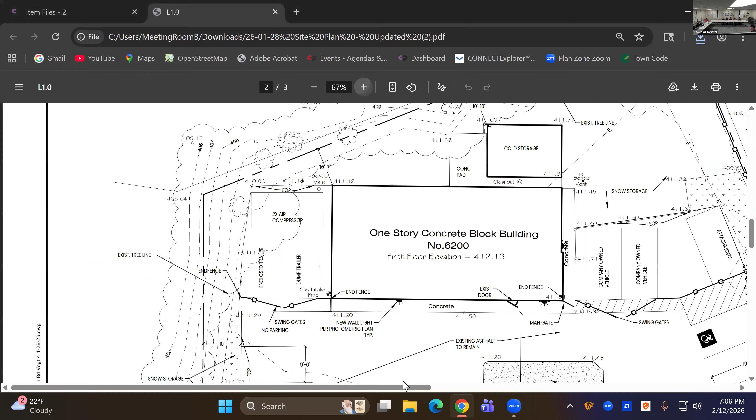I forget the gentleman's name, Jeff something, from FD. He looked that over and the plans we selected work for their requirements. We changed up the shape of the bed for vehicle movement, added some details as far as where parking lot edges are identified, and added the lighting plan.

Included a detail for the sign, which is going to fit the existing sign on the building, less than 20% of the front facade square footage. I think that is pretty much all the changes.

Had a sewer and septic company come and confirm the septic is working, with the understanding that the county will not approve septic repairs or replacement. If that system fails, we will have to hook up to municipal sewer.

Yeah, okay, we've worked through this one a couple of times. Any further questions? Okay.

I will put forth a motion to approve the site plan dated 12/16/2025 and last updated 1/28/2026 with the following findings and conditions. This applicant has worked with the board to present a project which fits with the neighborhood and area and within the design guidelines, notwithstanding the many site constraints.

This board has reviewed the Onondaga County Planning Board referral of 1/7/2026, which made the following modifications, accepted as conditions of this approval by this board: work within the state right of way will require a highway work permit. Private use, including storage of or installation of hardscape materials or structures within the state right of way, must be coordinated with New York State DOT.

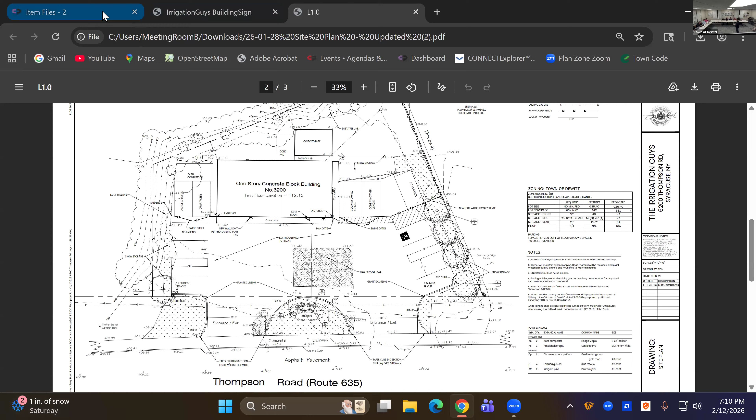Welcome, hello everyone. I'm Tony with Victory Sign. I'm representing Saab Technologies. They're in the Colomer Business Park area.

I believe we have a ZBA application in now. Correct, and I guess this is just a recommendation. So what they're trying to do is they want to put an illuminated channel letter sign on the front of the building. It's a front lit illuminated sign.

The sign size and style complies with code, but the difficulty is the code says a sign must face the main road. Well, in that plaza there is a road in front of their building, but it's not a named road, so their sign would have to go on the side of the building. The problem is the side of the building doesn't have a public entrance, and it is a fenced-in area.

Their entrance does face Colomer Road and their parking lot. So if you come down Aspen Park and pull in, you're going to be parking in this parking lot, and that's going to be the main entrance for the building. It does face the road, so it makes complete sense to have the sign there and not on the side of the building where there is no entrance whatsoever. So that's what we're asking for: permission to put the sign on the front of the building.

Northwestern does have a sign right here on the front of the building, and there's a couple other buildings in the plaza, or complex, kind of the same way. So it does make sense to put it where it is. And the sign that we're proposing does comply with square footage, styles, everything else.

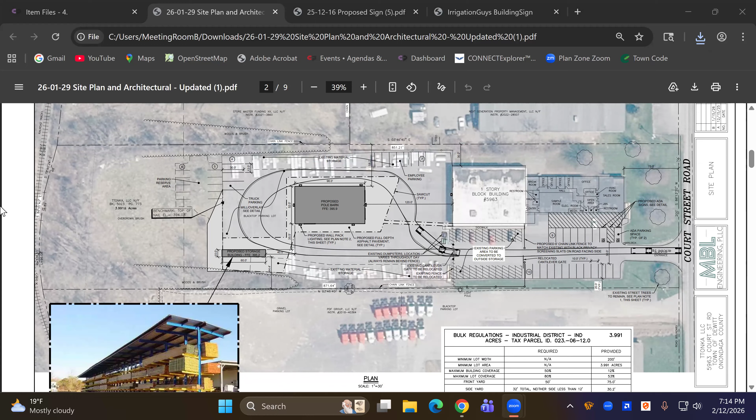So yeah, from the last meeting we talked a little bit about parking. First on the parking side, you can see we have put together a plan from the original building drawing that shows the front layout of the warehouse and the office space. Then just below what you're on right now, you can see the bulk table that shows now we've broken out the office space versus the warehouse.

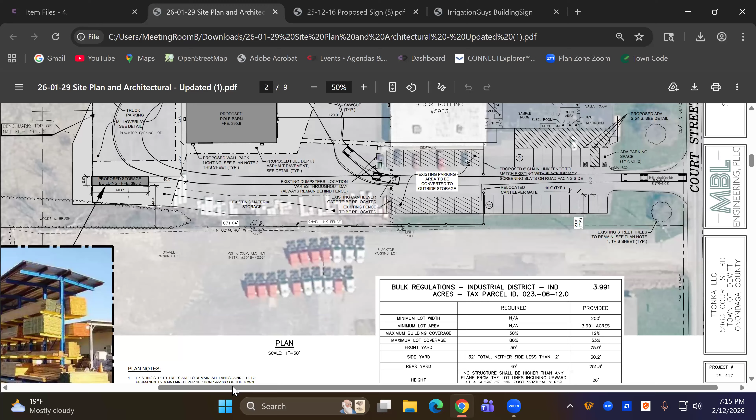But we did show the future allowed parking in the back left corner, which is underneath, I believe, that 25% number, to show the additional 11 spaces that would be shown that they fit on the site, but we don't need them. And I think we all agreed last time we don't need them, but as long as we show that area. So on the back, yeah, scroll up a little bit, right there where we say the parking reserve area with the 11 spots, which worked out well. Plenty of room there, obviously, so that was good there.

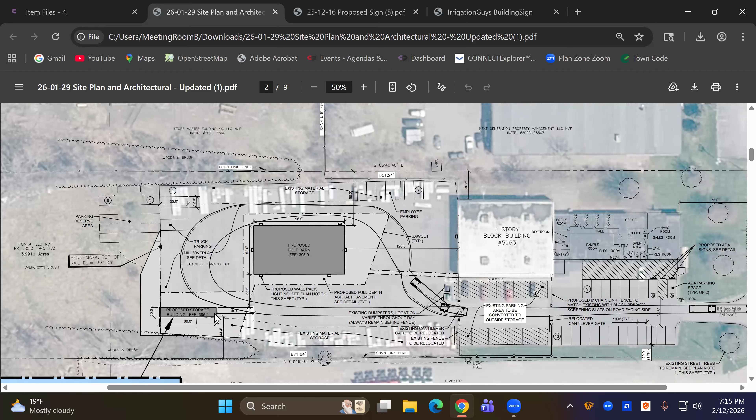Then another comment that we did was we wanted to add the fire truck or the tractor trailer turning on this plan, which you have, and also the storage building, the 10 by 60 storage building for the rack storage. That photo of that on the bottom left-hand corner was just incorporated into the plan as well.

I think based on the last meeting, that's really the major changes that occurred - was showing the office layout and all the interiors of that with the parking requirements, and then showing all that and the truck turning movements.

So one other comment that we wanted to talk about was obviously where we have the existing dumpsters - you can even see them in this aerial today - and the discussion of either creating an enclosure for them or screening them. So what we did right now is we were adding the existing parking that we're converting to more outdoor storage, right where they're at right now. We're moving that fence line that used to exist on the back side of the warehouse, and we're just pushing that out to the front because that parking just doesn't get used at all. So that gives them the space that they lost a little bit out back with the truck movements in the building.

We're able to use them in that space. What we proposed is that chain link fence that would be put on the front of that warehouse would be a screen chain link fence.

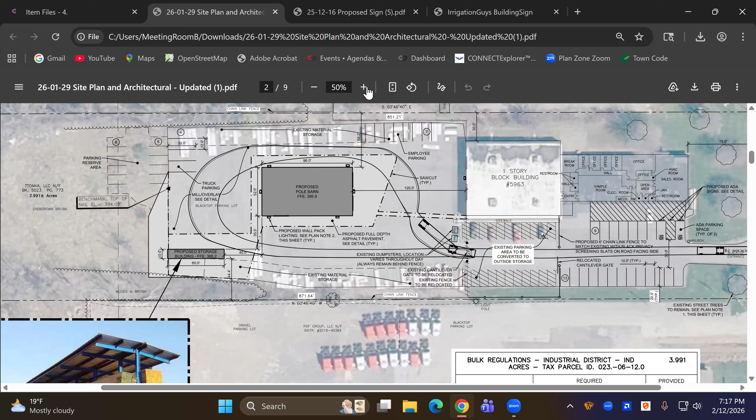But I think more important, those dumpsters are behind it today, and they will continue to be behind it. The nature of their business, the dumpsters actually get moved continuously throughout the day. They move them to whatever project they're working on. If they're packing up or taking material to unpack, shingles or whatever it may be, they actually grab those dumpsters and move them to those locations. But at the end, they kind of get put where you see them now.

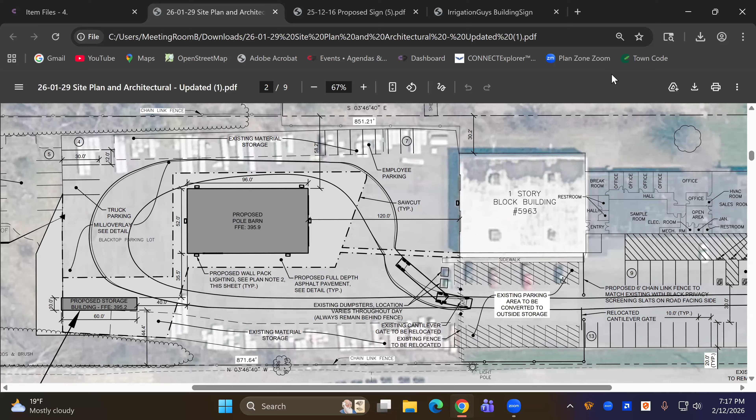So one comment when we were creating a complete dumpster enclosure, we wanted to talk about section 192-93 of your supplemental code, and how we look at this. Dumpsters must be completely screened from view from any abutting residence, residential district, public street, or walkway, and the screening must be at least as tall as the dumpster. It applies to all dumpsters, including those used for collection or storage of recyclable materials, whether public or private. So that section is where we feel like we really fall into being a dumpster and not a refuse collection area, because these dumpsters are very moved around.

We are screening them more than they are today, even though they're back behind the fence today. The fence isn't screened, but with what we're proposing, moving that fence out, the dumpsters are now further away from that fence line. There'll be a lot of shingle storage and stuff in front of the dumpsters now, where we're showing that future storage. So all that again is taking away from seeing those dumpsters as well.

But I think the most important thing is the screening that we have on that new fence along the road. Can you talk a little bit about what that screening is? We were just going to use our 6-foot chain link fence with black vinyl slatted screening inside the fence. So it's just your typical slat screening in the fence.

So that's generally not something that this board favors. Those vinyl slats blow away, they disappear, they crack and fall apart, and you get missing chunks here and there. Is there another option for screening?

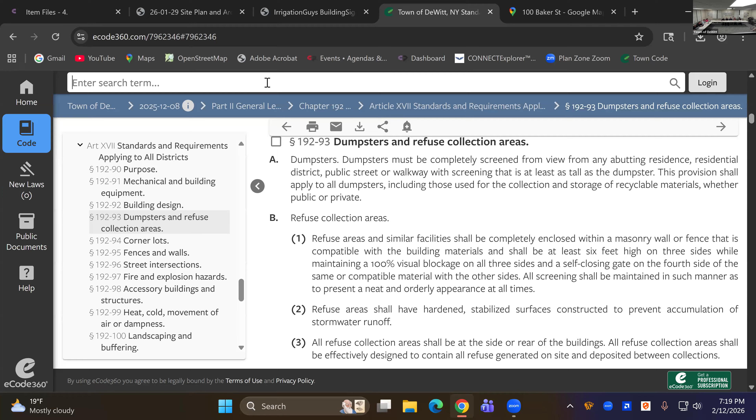Okay. I asked that because my main intent of asking is our dumpsters could be put behind the building all the time. And I believe the owner's on — I can't see who's on Zoom right now. Yeah, I'm here, Mike. I'm sorry.

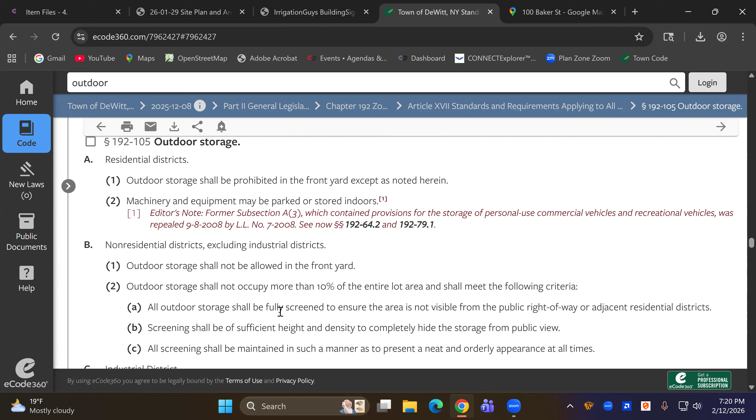Yep, one thought process we came up with is to continue doing what we're doing with the chain link fence, which will help screen the storage area, but also move the dumpsters to behind the building. Furthermore, we talked with the owners and they move them so much that they're okay moving them inside when they close at night and putting them inside, so they wouldn't even be outside at all after hours. So that's something that we would propose as well, so maybe that would take care of your dumpster concern.

Yeah, I mean, I think certainly having them behind the building is much better at a minimum. If you can get them in the building, that's great, but our concern is just that those would be screened by the building so that they're not actively visible from the street.

Yeah, absolutely. We could tuck them in behind the northeast portion of the existing warehouse, where it says one-story block building, in the upper left-hand corner of the screen. There's enough room to place them right there, and they would be completely out of sight. The nice thing about having them there is they're also kind of out of your truck turning area, so you're not that close to them.

I would say that's a reasonable solution, at least from my perspective. That works — I agree. So then the other item is just the screening.

And did we not look at some of the other fences around that area? Was that this one, or was that this one? They are chain link, but none of them had slats.

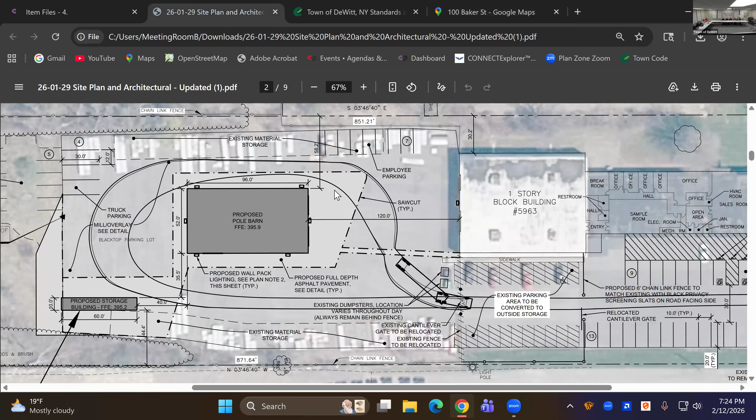Okay. Any other kind of questions? I mean, I think those were the big issues that we had on that one.

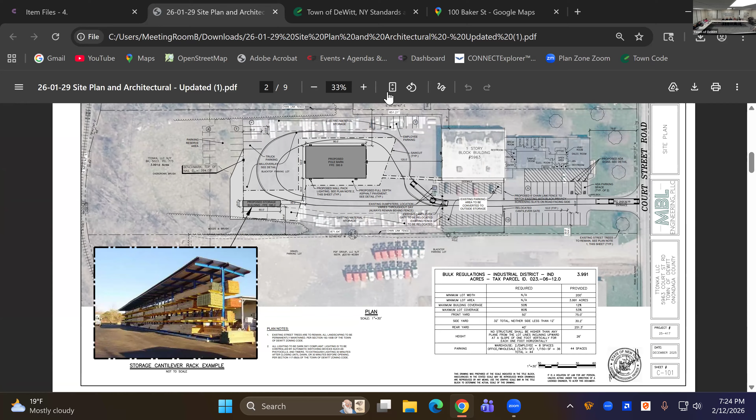So for subsequent drawing packages, show the dumpsters relocated where we were talking about, and remove any indication of vinyl slats in the fence.

Is this something that can be a condition upon approval, or is that something that we need to get updated with your drawings now before any approval can occur? Yeah, we'd like updated drawings, please.

Yeah, make those updates, get them in. If you get them to us quickly, we can see how many projects we have on the next agenda, but we'll just see what we can get those to you, probably tomorrow, get those couple notes changed, and then if we can get that on the agenda in 2 weeks, that would be fantastic to get your final approval next week. I'm not sure what everything that came in today yet, but we can try.

Okay, yeah, we can do that. And I think, Joe, that is reasonable if we can get in the next 2 weeks with just these minor changes. Oh yeah, that's reasonable, yes.

Well, recognize that our next meeting is in 2 weeks, so you can't turn it in the day before and expect to be on that agenda. If you want a hope of being on the next agenda, because these are minor modifications to this set, give us enough time to review them. I would have them in as soon as you possibly can.

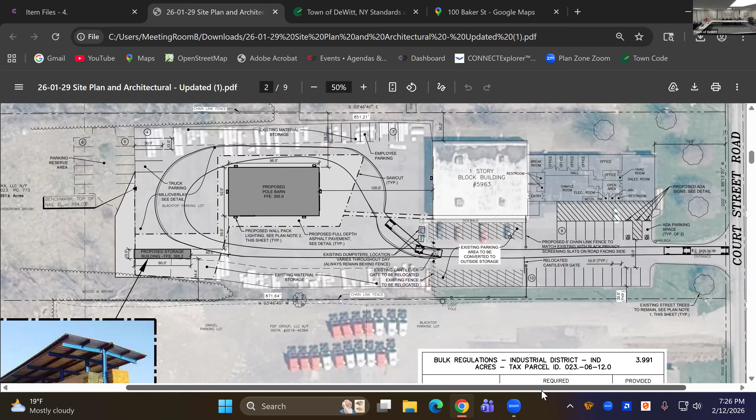Okay, we have, and I am gonna butcher this, Saia. Took me about a week to figure that one out. It wouldn't come out right, and I don't want to butcher it. So, Saia Motor Freight.

Okay, wonderful, welcome. Hi, I'm Jason Brown, I'm with Dunn & Sgromo Engineers, and we represent Saia. If you pull up the plans.

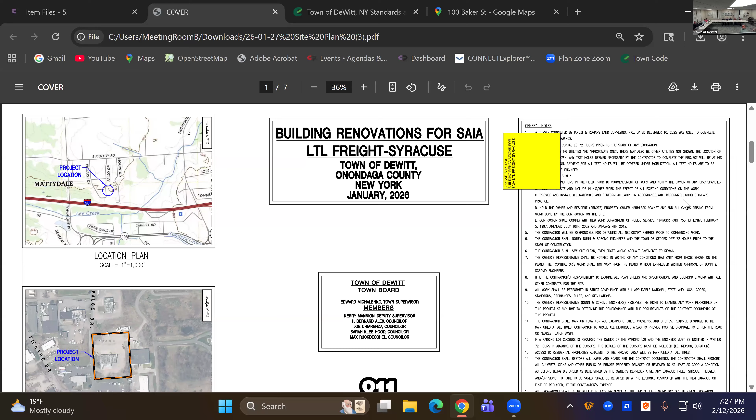So I'll give you a brief history. Saia's been on this site since 2019. They're a freight company. They use this building to facilitate freight, bringing in truckloads and distributing it to smaller trucks throughout the area.

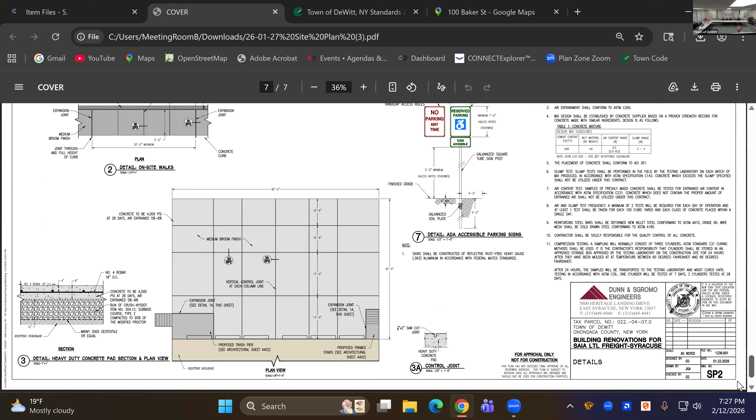If you go to SP3, the third plan, we provided you, while it wasn't required, an overall look of their entire site. We're basically looking at this parcel, but they also own 3 additional parcels adjacent and contiguous to the property. Two of which they use for operations, and one has an abandoned building that is not used. They have no plans to use it at this time.

You can see the overview of their facility, and we provided a nice trucking layout showing what they currently park there. In this particular area we've got the lower left trapezoid-ish parcel, this small L-shaped parcel, and then this parcel in the back, and this parcel here. The one in the upper right is the one with the abandoned, vacant building. This is their operation, and this is the parcel we'll mainly be talking about.

So why we're here is they're planning some building upgrades to better facilitate their operations. With those upgrades, they're going to demolish approximately 3,900 square feet of building in back, which is basically a covered truck portal where trucks are backed in and worked undercover. They'd like to remove that and open it up so it's more like the rest of the building. They're also going to relocate the dumpster from the side to the back of the building, away from the street, and add some ADA accessibility.

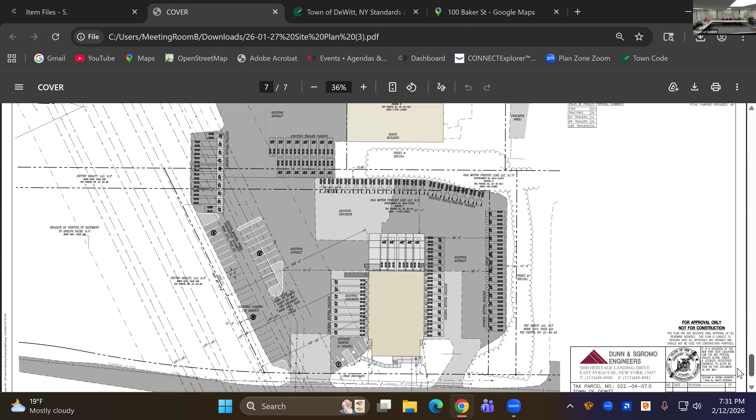Yes, that's exactly what the driveway entrance and site look like. We want to treat that as new work so we can bring all of it into conformance, since that was not permitted work, so Mark's going to want to take a look at it. If there's any drainage issue, site coverage, lot coverage, anything like that, we'll have to look at all of it.

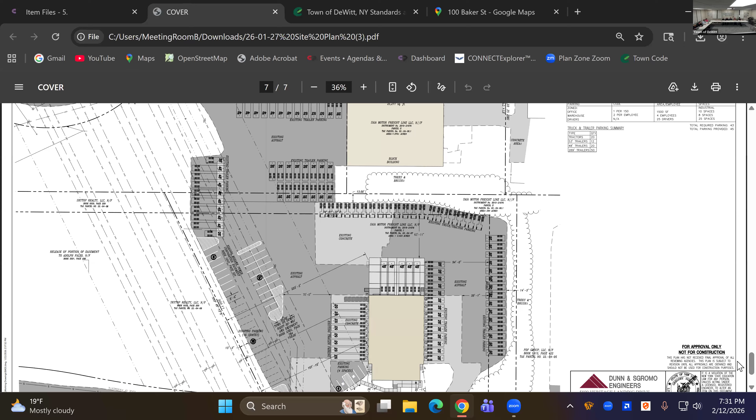So putting the dumpster out back and removing the building, I think that's all fairly straightforward. We looked at this from multiple angles, and it's in a dead end loop back in that area, so we appreciate you tucking it behind the building so it's not visible from the side.

The other thing we want to get a sense and understanding from you guys: there's 3 parcels right now, correct, these 2 parcels that we're looking at. Is there a reason for the little narrow parcel around the outside? I believe that's just the way the parcels were when they bought the property. Yeah, it's been like that for several years.

I think there's an issue where you're parking and crossing over the property line, certainly on the right hand side and some of the other sides. It would be ideal if this is part of their property - well, it's 2 separate parcels, so even though same owner, it's 2 separate parcels. It would be ideal if we could look to subdivide those 2 and combine the parcels to eliminate some of these over the property line issues.

Would they be open to consolidating? It's not a buildable lot, you can't really do anything with that narrow piece that goes around there. But when we talk about combining the narrow piece into one of the other 2 lots, are we talking about combining it with the lot this building is on, and then the narrow one stays separate?

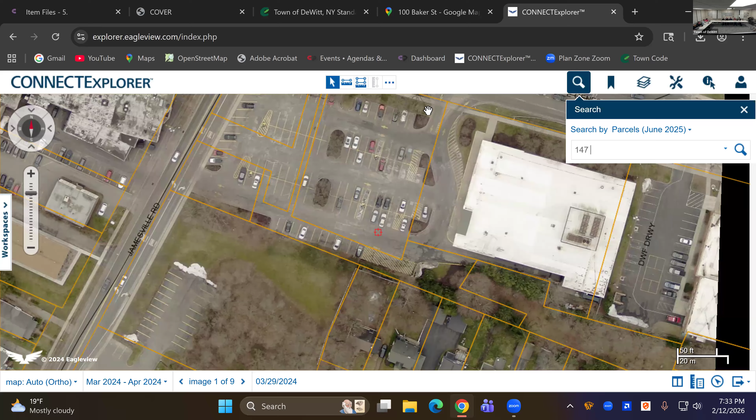Because otherwise you've got to cross over that property to get to the other one - it cleans it all up and makes it a lot better. I can't see what the problem would be with combining that narrow strip with the one we're talking about, and they might want to keep the other one separate in case. I think that makes sense to keep separate.

Yeah, it's just that narrow one we can combine with this one, then when you're putting trailers on - there's pavement that goes over it - it just cleans it all up, puts it all on one parcel. And they don't necessarily have that many trailers or tractors on site today.

There's a lot there, and they're all over the place, so we said you might want to organize them a little bit, and they said give us a plan. So we were trying to say, okay, here's where you can park them. I think it's less than they have today by far, but still better than what they have today.

I think just by subdividing that - that's not a buildable lot, it really needs to be combined, with easements and all of that. We'd like to not have lots like that be able to be sold on their own, it makes them...

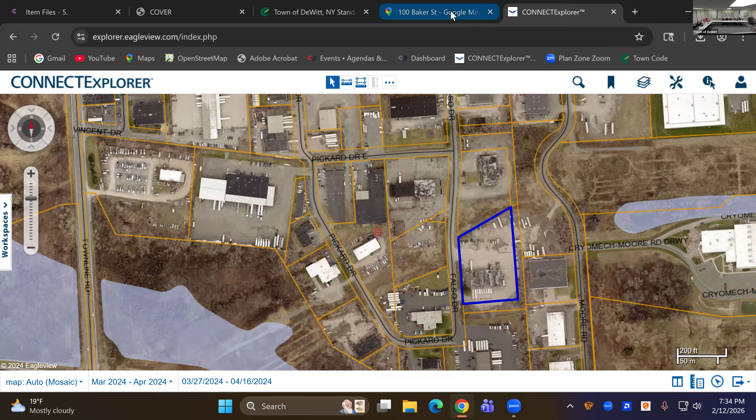We can talk about that tomorrow. So other than that, unless there are other questions or comments, I think we'll have Mark look at all of this stuff. It might be listed as existing - we're going to have to probably strike that and have it as new work, so it's all reviewed for us. If you could talk to them about getting that piece addressed, I think we're heading in the right direction.